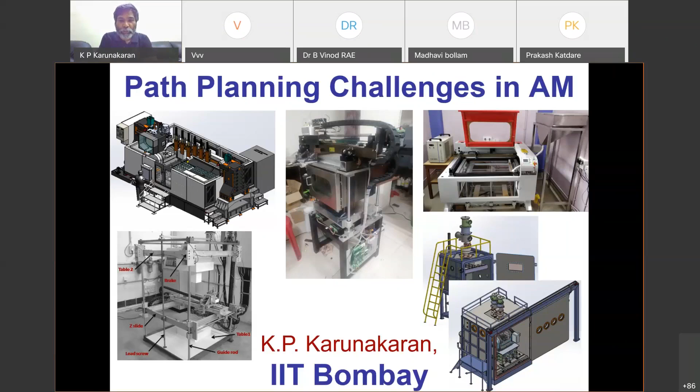So I know the difficulties involved in path planning activities on any motion systems. Therefore, I try to capture my experiences and put it in this form. In terms of my experience, I was with Hindustan Aeronautics Limited for about 9.5 years. I was posted in Kanpur, where I made use of the presence of IIT Kanpur. I started my PhD, in part-time mode, and subsequent to that, I joined IIT Bombay as a faculty. So it was a great journey, which finally landed me in this teaching profession, which I really enjoy.

Coming to the contents, I'll start with some preambles related to the topic and not really related to the topic. Then I'll talk about the positioning systems, then the various path planning strategies, which I have put into 3 categories.

The first one is common to all HED beams. By HED, I refer to high energy density beams, typically electron beam and lasers. Of course, there are also new HED beams coming up. Some people are even talking about microwave being focused as a sharp beam, which can be used for additive manufacturing. But as of now, lasers are dominating, and electron beam also is developing, but electron beam is yet to become popular.

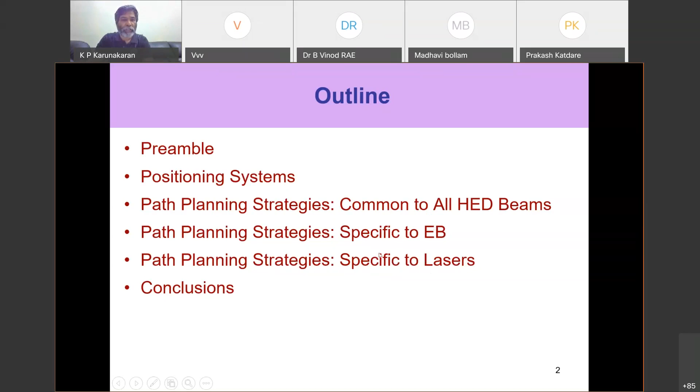So we have path planning strategies which are generic in nature for both, then path planning strategies specific to electron beam, and finally path planning strategies specific to lasers. Finally, I'll conclude. So I'll start with preamble.

Because of my association with HAL, or I got associated with HAL because of my passion for flying, I never did any flying when I was in HAL. I was a manufacturing engineer. Even here, I was focusing on manufacturing till about probably 2005.

I'm one of the earliest in the country to develop a drone and fly it. We took part in an event in 2006 in Agra organized by DRDO. Today, I have a drone which is large enough. I'll play the video, which is self-explanatory.

What is more interesting is the entire thing is made out of stainless steel. When it comes to flying, immediately you think of either aluminum or graphite FRP. Whereas we decided to go for stainless steel mainly because money is always a problem. So we are short of money, so we try to do a combination of good design and a simple material, because you can get welding done easily in any simple shop. Whereas if you want aluminum or graphite fiber, manufacturing cost is very high. So that is why we went for it.

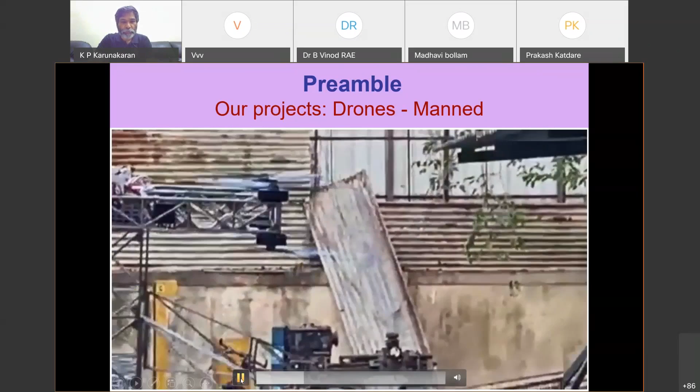But now we realize that this is also a good way to do it. I'll run the video. Currently, it is flying in empty weight. This was on November 20. It's a very big one. The overall size is 4 by 4 meter footprint.

We have made a particularly long landing gear in order to avoid toppling, because the first time we are doing it, it's really scary.

This is me. I was later tied onto it because the blades are, like a Vishnu Chakra, very close together. So I was tied on it, and then he tried to lift, but it was a bit too heavy.

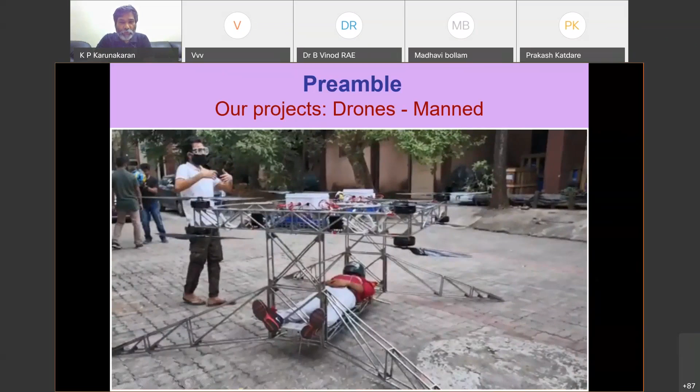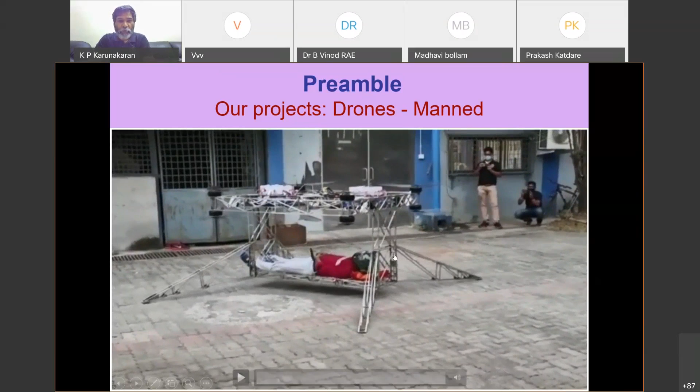So since then, we reduced the weight of it. So we will be flying. We have reduced by about 40 kilo weight. So I'm sure it will be able to fly very well.

Okay, so that is one. And in that case, they are all fabricated out of 10 by 10 square tube, 1 millimeter wall thickness, stainless steel 304. Now, using the same tube, we fabricated this.

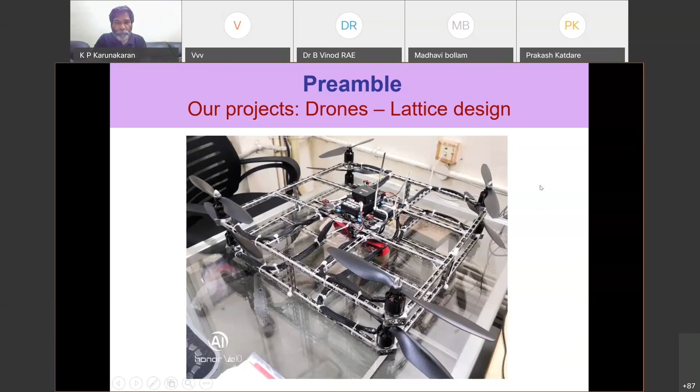Now, it's the same 10 by 10 square tube, but using laser cutting, we did a lot of hollowing. We typically use SolidWorks to do the design, then use FE analysis, optimize it, and then obtain it. Now, this was first flown yesterday.

So we found that this is as light as the plastic drone that you will find. That's the interesting part. It's made out of stainless steel, but the strength is not just the material. It's a combination of the design and material.

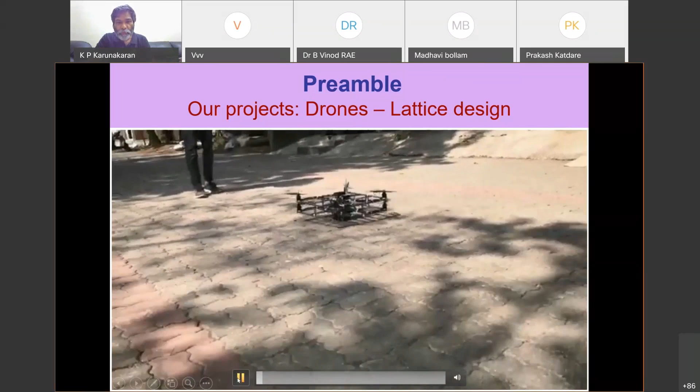So here, we all know that lattice design can be realized using 3D printing. We used in a way a lattice design, but with traditional manufacturing. This uses again an 8 rotor, 4 pairs of coaxial rotor.

So this is what I'm trying to promote. Now that's about the diversion. Now we will get back to the main topic. Some preambles related to the topic.

Subsequently, we realized that we can also hybridize a few more things. For example, when we try to create a layer, the outside of the layer only needs to be more precise geometrically. So we used laser deposition in 5-axis mode to create the outer periphery of the boundary of the layer. Then we fill the inside with rasters using 3-axis MIG, metal inert gas cladding. This way we were able to combine different energy sources, laser and MIG.

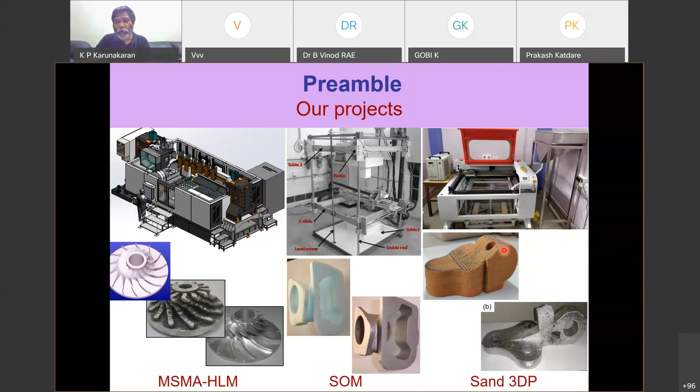Because I don't have to waste my time sintering the sand in areas that aren't needed, we are able to make a mold which is contoured in nature. So apart from saving money in mold making, it has the benefit of good heat transfer because the wall thickness of the mold is uniform all around. So this is our sand 3D printing effort.

Recently, we have developed a machine which will print ice. So water is used as a raw material, and we use multi-jet printing. It's not our original idea — Professor Ming Leu in USA developed it. He called this process rapid freeze prototyping, if I'm right.

Rapid freeze prototyping, RFP — he used an FDM-like concept with essentially 2 nozzles, as in fused deposition modeling. One nozzle was dispensing pure water, which froze at 0 degrees centigrade. Another nozzle was dispensing salt water or sugar water, or water with some impurities added. The moment an impurity is added, the freezing point comes down. So the purpose is: pure water is used for model material, impure water is used for support material, and the whole building happens at sub-zero temperature, something like minus 20 degrees centigrade.

You dispense, create the layer, model and support, and raise the temperature to about -5. The salt part of it dissolves, and then you have a beautiful model available. So what is the use of it?

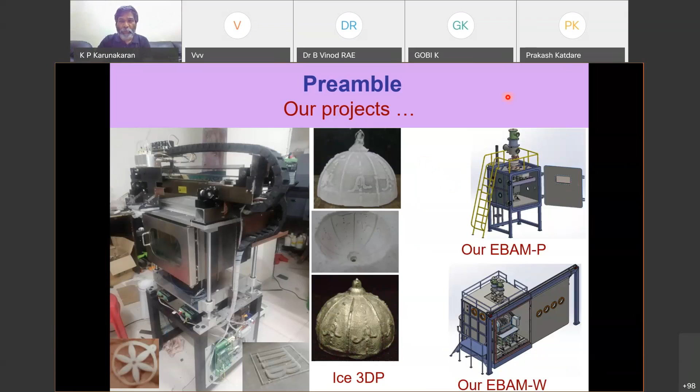Having said so much about the various projects going on in our lab, we will now get into the topic closer. Again, part of the preamble, let's have a few more slides.

First is the various tools used in additive manufacturing. I can group them into 3 categories for the purpose of this lecture. One is a single nozzle or jet or beam - it's a sharp one.

Examples are fused deposition modeling - it could be an extrusion head, it could be a blade which is vibrating and cutting, as in laminated object manufacturing, or it could be a laser or electron beam.

What are the typical characteristics of the single nozzle, jet, or beam? You need to address every point in the volume. That means you realize layer by layer as in any additive manufacturing, but then every point in that layer has to be addressed, maybe by line, and each line you address point by point. So the time is proportional to the volume of the object you build, plus of course, if there are support structures, you have to include those volumes too.

So in terms of computer graphics or motion, we will call it vector graphics, because you have a sharp tool that has to move along different paths, unlike raster graphics. What you see on a TV screen is raster graphics. Here it is vector graphics.

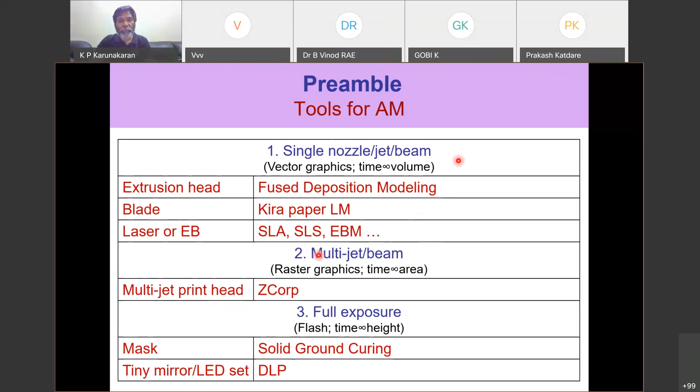So our main focus is going to be on the first part of it, in the rest of the slides.

A few more slides to emphasize the importance of laser and electron beam, or what I call high energy density beams, HED beams. There are several processes. In fact, the very first 3D printer developed was SLA, which made use of laser. People developed the most complex 3D printer first, then they went for simpler and simpler systems.

SLA made use of a UV laser, about 100 watts, sometimes as low as 50 watts, because only polymer was used for curing. The monomer absorbed energy from the UV radiation, and then polymerization was activated.

Selective laser sintering is the most popular. In terms of precision, SLA is still the leader. In terms of production rate or productivity, yes, selective laser sintering is the leader, and it is useful for metal, ceramic, and polymer - for all three. Depending on the material, the wavelength of the laser could be different.

For non-metals, typically you go for CO2 laser, which may be about 10.6 micrometer wavelength, whereas for metal, you have to go for very narrow wavelength, something like 1 micron.

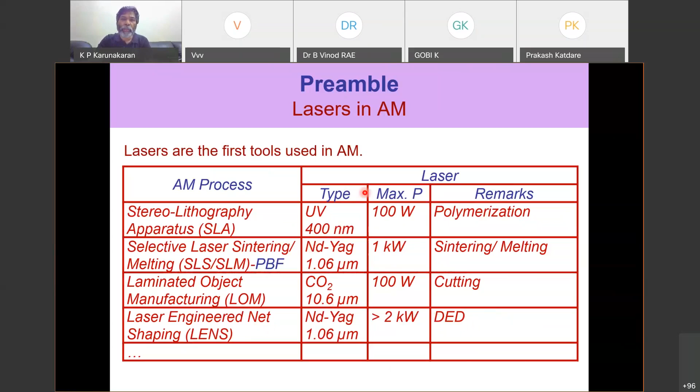One is HLM. I told you in the beginning itself, the outer profile we try to deposit using a laser cladding system in 5-axis motion. We have a 4 kilowatt fiber coupled diode laser from Laserline, and we are the only one in India to have a wire cladding system, to my knowledge, or maybe people might have procured recently. When we bought, we were the only one to have a wire cladding system, because laser always goes well with the powder as the stock as far as the cladding is concerned.

Okay, we'll not get into the details why it is. Otherwise, if you have question answer session, I can clarify that. Otherwise, typically people were using only powder form of raw material for laser, whereas we decided to go for wire because we wanted to use it in conjunction with metal inert gas welding, which uses always wire. So we didn't want to maintain 2 different inventories for the same part. Okay, so that is why we hunted around and we located it.

We got it from Fraunhofer Institute in Dresden. It was called CoaxWire head. So this whole system is about 2.1 crore investment.

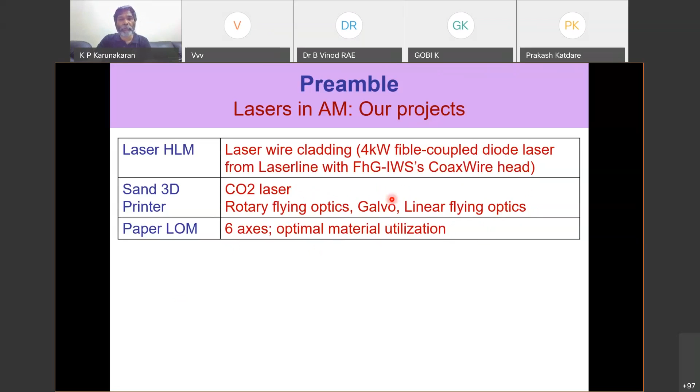Now coming to electron beam in additive manufacturing, electron beam the most important advantage, when we talk to people connected with energy or government agencies, we can say that energy efficiency is high because a laser is hardly 15 to 20% energy efficient. We are talking about energy drawn from the wall plug as electric energy. That is on the denominator, and put on the numerator the heat it actually creates. Okay, that is hardly 15 to 20%. Sometimes people claim 40%, 45% and all, but they are all under very ideal conditions. But average is never more than 15 or 20%.

So in electron beam as well as MIG, the energy efficiency is extremely high. 85 to 90%, sometimes 95% energy efficiency is possible. Especially in electron beam, you don't lose energy in convection because the whole thing happens in vacuum. So you don't lose energy in convection loss. Therefore, it is even little more, marginally more efficient than MIG-based system.

In fact, at some point, I would even consider MIG and electron beam same. In both, you give electricity. In both, you have some arc happening. That means the current flows without physical contact. Some kind of plasma happens between them. In one case, the gap is very high. In MIG case, the gap is as low as 10 millimeters, whereas in electron beam, the gap could be as much as 500 millimeters. Therefore, you need to have it in vacuum. MIG cannot happen in vacuum. MIG maintains a complete plasma between the two electrodes, whereas in the case of electron beam, the plasma is only at the region of the melt pool.

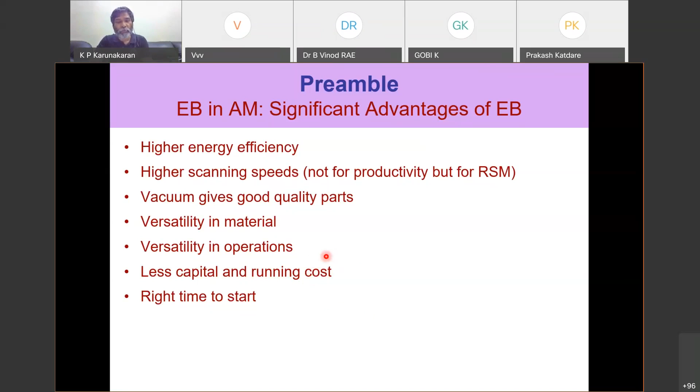I strongly feel that this is going to be the future for metal additive manufacturing, and that's also reflected by the fact that we were able to get good funding, although we are not experts in this area. Electron beam, we are reading about it only for the last 4 years, and we are still trying to understand what it is.

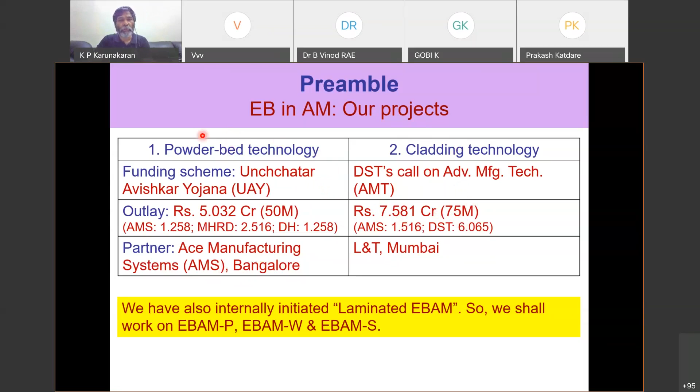We bet on the capability of BARC for the basic knowledge. We still don't know how we are going to deflect the coil. I'm going to discuss it in the subsequent part of the lecture. I have another half an hour left, still in preamble. So I already told about 2 projects, 5 crore on this, about, it's not 7.5 anymore, it's about 6 crore. So about 11 crore together.

Now we have already discussed a lot about the tools we are talking about. Milling or even forming tools, there is a physical contact between the workpiece and the tool, and these movements are typically a single stroke or few movements which are substantially longer. In milling, the cutter is large, therefore with about 5-6 passes or 20 passes, you will be able to cover the complete layer. Whereas in the beam-based system, the beam is very small, therefore you need several scans to address the complete layer.

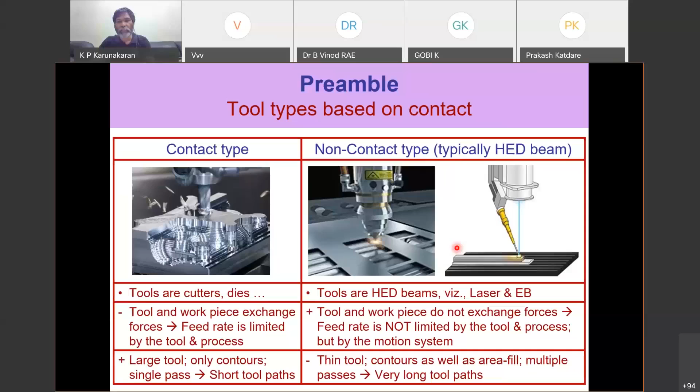So the tools that we use can be divided into contact type tools, which could be end mill, forming tools and all that, or non-contact type tools, where I refer to high energy density beams, laser and electron beam. Now, some of the applications and their characteristics. All these laser and electron beams can be used for joining, cutting and engraving. That is one group of applications, or additive manufacturing. On the left side here, I've listed the various characteristics of that.

Accuracy is almost the same, whether it is joining, cutting, engraving or AM, but the other things differ. Number of passes in the first group of processes, it's just a single stroke or few passes, whereas in electron beam, you may do very rapid passes, but the same pass may be repeated several times, so the passes are more. And looking at the length of travel, it is very short here. Whereas here, the length could run into several kilometers because each layer has a contour and then a lot of rasters to fill the inside and multiple passes of these two, so the length of movement is extremely long.

Now, that length of movement has a very interesting characteristic. In the pick and place device or in this type of process, it's a single length, so you have sufficient time to ramp on, go steady, and then ramp off. Whereas here, the movements could be very short. Look at this particular picture. Let's say that this is the layer we are going to produce. You may go in several parallel vectors, or you may fill it with raster. So you see it's not a single long motion, but several small vectors of motion.

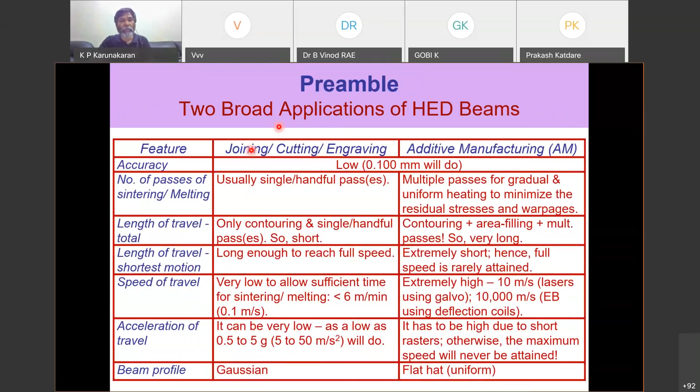Now, how do we achieve it? We are going to see it a little later. So these are some of the interesting differences between the requirements of these beams for traditional manufacturing applications and additive manufacturing applications. All our discussions are based on these preambles.

Now we'll quickly go back. This is the actual starting of the topic. We'll discuss in the next few slides the various positioning systems in use.

So if you talk about various axes, each axis has a motor and drive system, and there could be multiple motions. There could be any number of axes. Each axis consists of a slide and a motor system, and there could be any number of axes like that, but there can be only a maximum of 6 degrees of freedom. Each axis consists of a slide like this.

So this is a belt-driven system. This is the slide. You have 2 wheels on which a timing belt is there. At one end of the timing belt, the slide is connected. So when you connect a motor here, when the motor is rotated, the slide will move. Now you can use this set to produce multiple axes. You can assemble like this to get your X, Y, and all that.

So it could be belt driven or it could be lead screw driven. You can have a lead screw at the center, connect a motor here. So when you rotate the lead screw, the slide will move back and forth. These are based on rotary motors. The motor you connect here or here is going to be the traditional rotary motor.

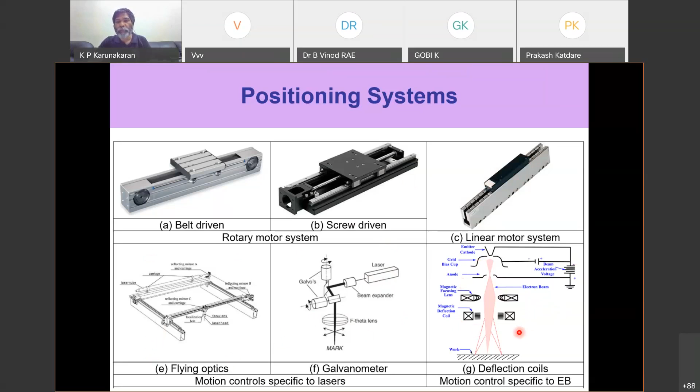That is why today we are able to move the beam at extremely high velocities, like 10,000 meter per second, or even 1 lakh meter per second in the case of SEMs. So these are the basic building blocks: rotary motor based or linear motor based, useful for traditional manufacturing machines or laser control. This galvanometer is specific for laser deflection, and this coil based deflection is specific for electron beam. So these are the various motion systems possible.

So we have already discussed a lot of details comparing both of these. Okay, so these are all some basic concepts.

I already explained the details of this picture earlier. And this figure, again, we have seen earlier that in additive manufacturing, lots of tiny motions running into kilometers are involved. Therefore, acceleration is more important than velocity, because the slope of this curve becomes the acceleration. So it should be as sharp as possible. When the acceleration is low, we never reach the maximum velocity. So for us, acceleration is more important.

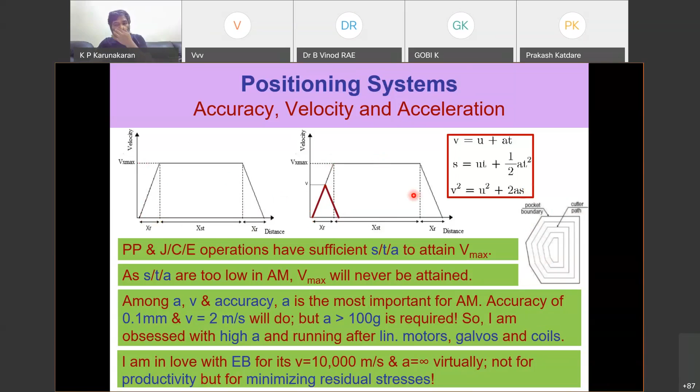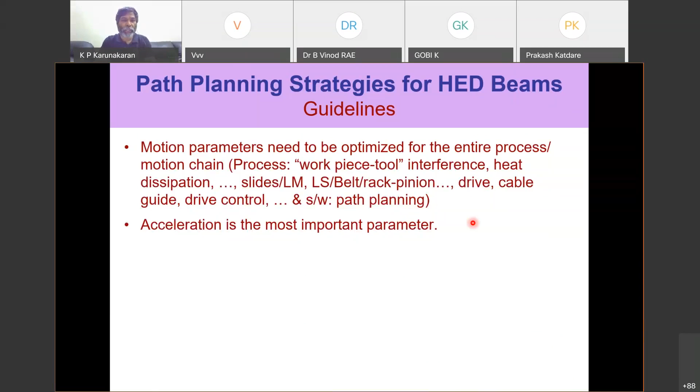Okay, we'll move forward. We'll quickly look at some guidelines, generic for both beams, generic for high energy density beams. As I have been harping already, acceleration, acceleration, acceleration. I am a fanatic of acceleration in motion systems today, not so much velocity, because our motions are so tiny and so long. So first guideline: avoid too many turns.

So if you are doing path planning, don't go for contour parallel area filling. So this is your layer. To fill the layer, you have several options. You can do contour parallel, raster about X, raster about Y, raster about 45 degrees or any angle. There are many other methods possible. You can make use of something called Hilbert curve - a lot of repeating curves are available. These curves can also fill it. You can even use traveling salesman's problem to address the various points. There are different methods available.

So our conclusion is we will never use any of those complicated motions, because the number of turns are more, the lengths of the motions are much less, so you never reach the maximum velocity. So our advice is to go for only raster.

Now I'll come to discussion related to the raster, whether it is 0 or 90 or any other angle. There is another guideline coming, I think the fourth guideline. Otherwise, you remember that compared to this type of twisting thing, you need long motions possible. This is one important guideline.

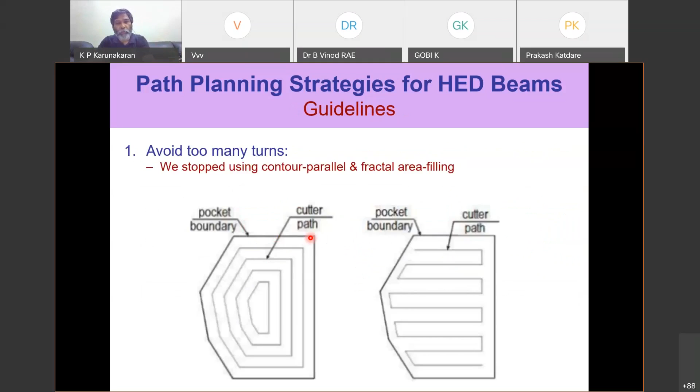Initially we used the length as the criteria. Then we found that, as in this example, for the given length, the number of passes are more here, number of passes are less there. So subsequently we decided we will use number of passes as the criteria, not the length. So this is the second guideline. First guideline: avoid too many turns, because every turn means one deceleration and one acceleration, so we would like to avoid it. Avoid the number of turns, segment the path, and deposit the segments at random to uniformly distribute the heat.

Third interesting guideline: no need to switch off the beam when you jump from one segment to the other. By doing it, we are able to use a very cheap laser, hardly 45,000 to 60,000 rupees, a 130 watt laser we are able to buy for about 60,000 rupees. So that makes it a very economical proposition. And it doesn't really affect the outcome.

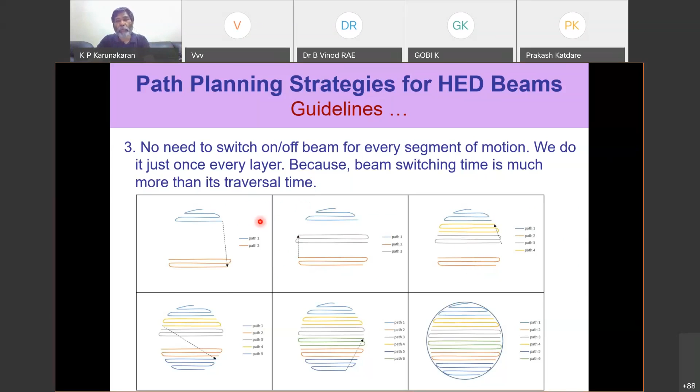That is our experience. The fourth very interesting guideline - I did this work during the Corona break, so I was looking at various paths. My recommendation to the students is always go for 0 and 90, alternating layers, changing the direction to 0 and 90 so that they nicely crisscross each other. That was the recommendation. Then subsequently, what is the advantage of doing only one axis at a time?

When you move only this axis, only X will move, so you can go at G00. Similarly, when you do this, you can go at G00. So when you use only one axis at a time, there is no difference between G00 and G01 - no interpolation is taking place. So that's the bottom line.

I want to avoid interpolation, because interpolation makes the system very slow. Because what is interpolation? If this is a line, the line has to be divided into small segments - how is the motion happening at a micro domain? Everything is based on a digital system.

For each pulse, you move either in X or Y, or you give pulse to both axes so that a 45-degree motion takes place. So this line has to be approximated into very tiny horizontal, vertical, and 45-degree motions. That is how motion planning happens at a micro domain - the interpolator does it. Now think of the number of calculations it will be doing. So any interpolator slows down the system drastically.

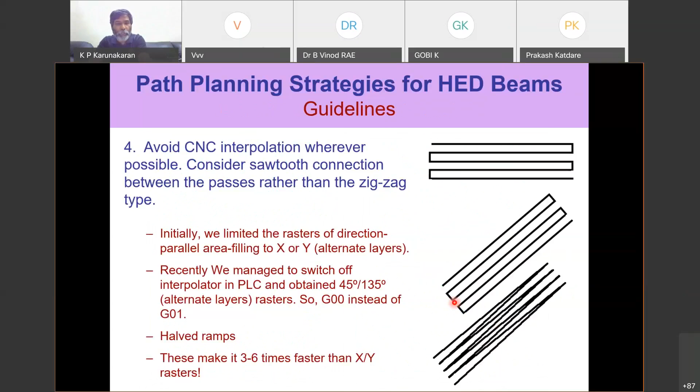Now if you look at this sawtooth, it is not exactly 45 degrees - it is slightly more or slightly less than 45 degrees. But when you move this in 45 degree in G00, it will make a 45 degree line and then a short vertical line - so it will actually be a 45-degree line and a vertical line. I don't know how much you'll be able to follow unless you have done programming - you may not be able to follow it so much.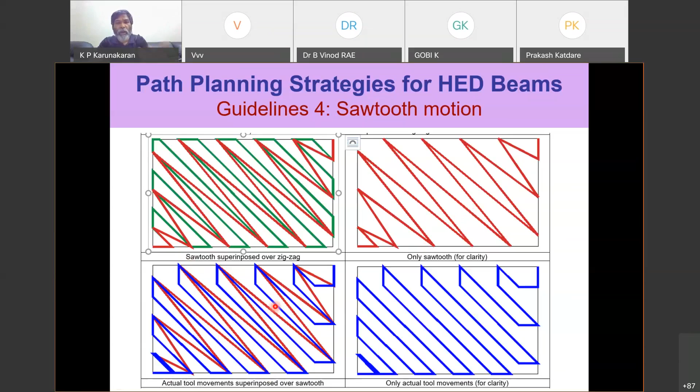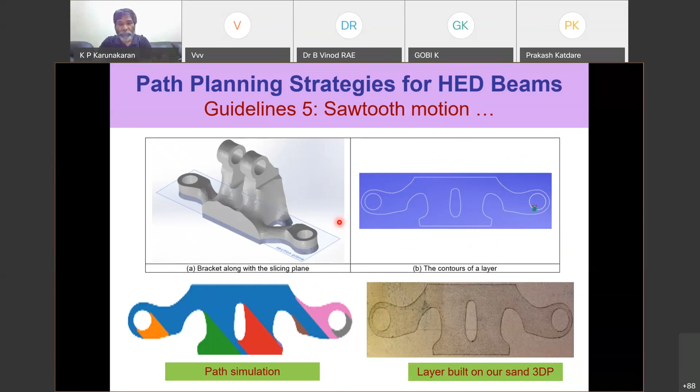It doesn't matter because your step over is hardly 0.2 or 0.3 millimeter, so it doesn't matter in the case of energy beam systems. By doing this sawtooth based system, we were able to increase the possible speed by something like 5 or 6 times depending on the contour nature. It's a very, very important contribution - we have submitted a patent on this algorithm.

So that is about the generic guidelines - 5 guidelines I gave. Then some guidelines specific to electron beam. We talked about electron beam capable of 10,000 meters per second - I'm running, another 6 minutes left. Now, when you have a CNC program, to read one NC block from the CNC program and then parse it, put it in the various registers, it takes about 30 milliseconds.

A good CNC controller may take probably 20 or 10 milliseconds. In 10 milliseconds, you can calculate how much length of movement is possible. 10 millisecond into 10 power minus 3, into 10,000 meter per second, so this runs into few meters. So 10 millisecond means a lot. In that time it goes far.

So this is what I'm talking about. We can never do digital computation; you have to manage the beam in an analog way. No longer can digital computation meet the requirement, because the entire system linked with that has to meet the speed. It is not enough to have only the car running at 100 kilometer per hour, the road also should support it. If the road has a bottleneck, then nothing can be done. The beam only is capable of moving at that speed, so all the motion system has to cooperate with that. So how do we do that? No longer digital computation, we will go directly for analog computation.

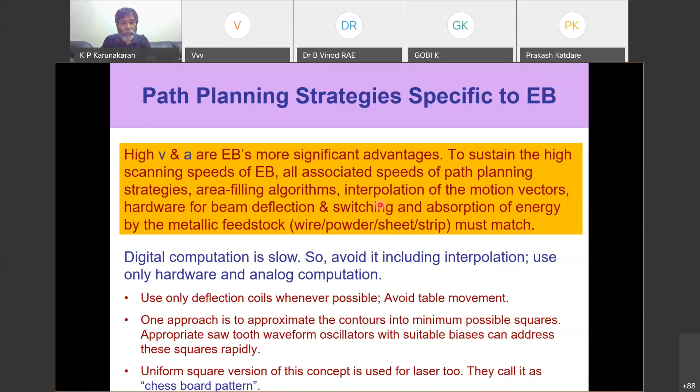So what we have done, I'll come back to that. We have developed a quadtree based algorithm. So this is the contour we are talking about. I have a quadtree program which can approximate the geometry into squares of different dimensions, different sizes. Now each square I can address separately and randomly.

So it's something like this raster graphics happening. This is nothing but electron beam. What happens on a CRT is the same thing happening in the electron beam system. So we will move the X and Y coil using sawtooth oscillators. That's where I said I'm a fanatic of sawtooth. So sawtooth based oscillations are possible. For X and Y, you give sawtooth waveforms of different frequencies to get this particular format.

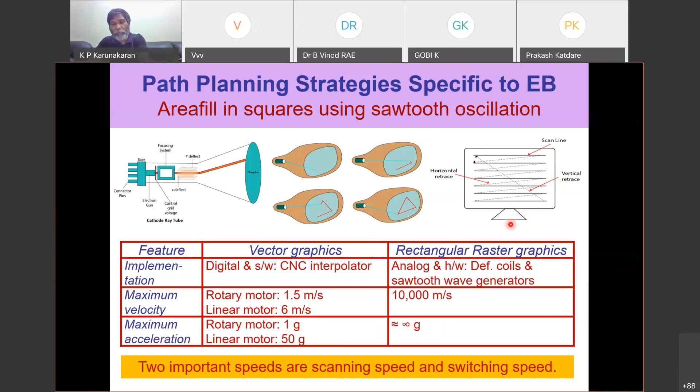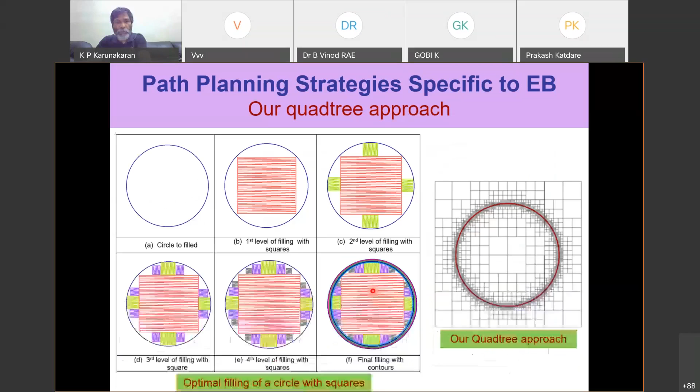So each square can be scanned by the electron beam by giving different bias voltages and amplitude for the X and Y coils. By doing it, you are able to get the scanning of different things. So only jumping from one to the other is a digital jumping, rest is all analog. This is how we have developed our system. It is going to be a quadtree based approximation of the geometry, so the whole system will happen as approximated squares. Finally, we do the contouring using the digital system.

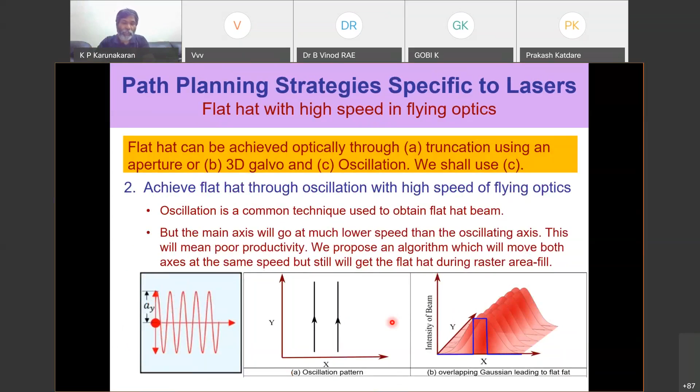Now specific to laser: laser is very sharp, so one can make use of oscillation of the laser. This is true even in MIG welding. Oscillation makes it a little flat hat, but then oscillation again slows it down. Therefore, we wanted to see, when the oscillation happens, this is how oscillation happens, whether...

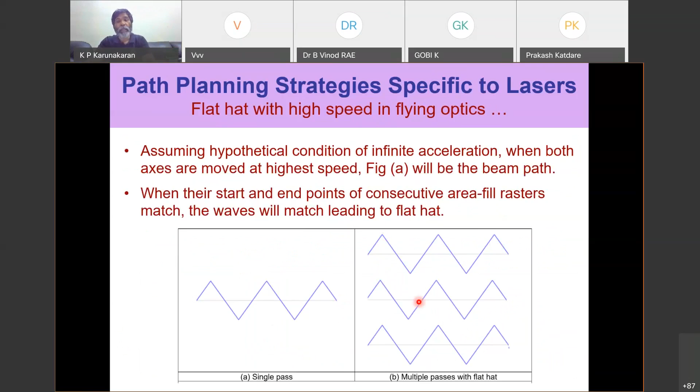We wanted to see whether the hill points and valley points of the oscillations can be matched. It is possible to match using the path planning algorithm. We matched it, but then we realized that matching it this way doesn't help, because each suffers the ramp. It ramps in some part, steady, again ramp down. So it's then recalculated, the wave is not really like this, the wave is this. So we could not use this, but we had to use this.

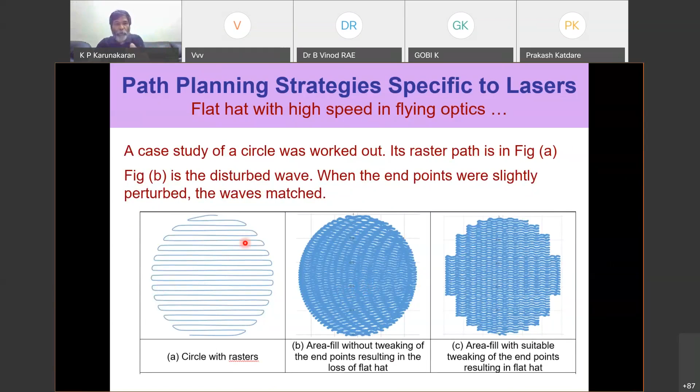If this is the kind of geometry we are talking about, and we assume this method, then we get this kind of thing where the benefits are lost. So we slightly prepone and postpone the motions. By doing it, we were able to get these waves to match with one another, and hence we were able to get that. Now I'm coming to the conclusions.

More or less, in terms of timing, paths are too long and in thousands of short segments in additive manufacturing. So the beam positioning system is the bottleneck for additive manufacturing, because the beams are able to move faster, but the motion system becomes the problem. Among the various motion parameters, acceleration is the most important motion parameter, not so much velocity.

Based on these discussions, we gave several guidelines for additive manufacturing: one set generic for both beams, high energy density beams, and a few guidelines specific to electron beam and a guideline specific to laser. As we saw during the discussions, when it comes to electron beam, its speed is far higher than anything else, therefore digital computation cannot match that. So we explored ways of analog computation. This is not new, please remember, the TV of the past has been doing it. But they are able to switch on the beam instantly at the required point. So we are trying to understand how it can be done, but analog is not new.

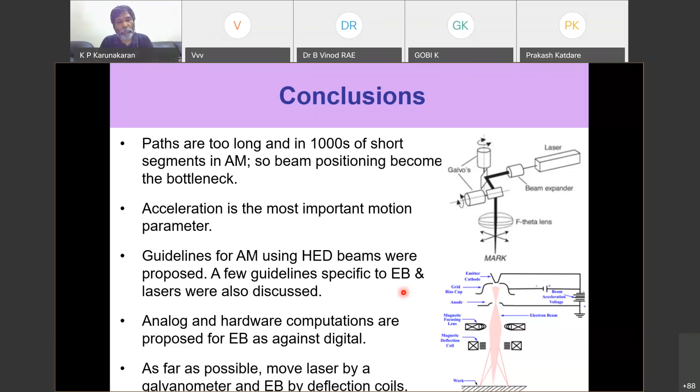Please feel free to contact me. I think I have my contact details here. I don't guarantee that I'll reply every mail, and I'm extremely bad with mobile phones. Most of the time it doesn't ring, but still, if you are a determined person, I'm sure you will be able to catch me. It's not out of ego, but a professor's time is not that important, and I don't want my time to be bound by mobile phones. I don't even maintain my phone well, it's about 15 years old, so I don't bother to maintain good communication. But certainly, if you are serious, you will catch me.

So with this, I conclude my presentation. Thank you very much for the patient listening. I'm missing the eye contact, so we can't help it. This is because of Corona and this online delivery. As the communication tools improve, as the bandwidth improves, we can have all people's video online so that we can interact also. Thank you very much. I close here. I'll be pleased to answer any questions if there is time.

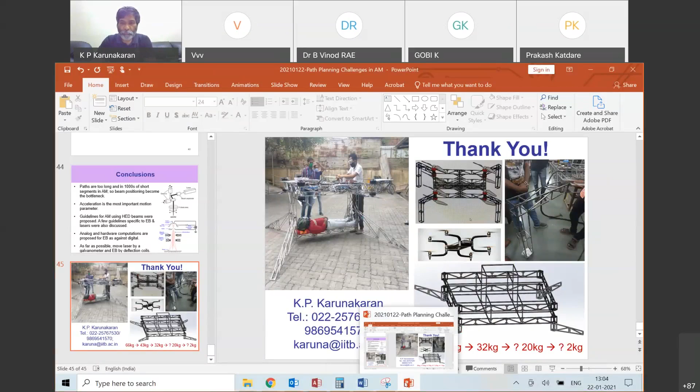Are there any? I can see the chat box also. I'll stop sharing so that I can. I don't see any comments. Only thanks are there.

That is why in our system, we do face milling every time. So we don't really care about variation of the thickness, because in our hybrid layered manufacturing system, we face mill after every layer. Yeah, very good. Thank you very much, a good question.